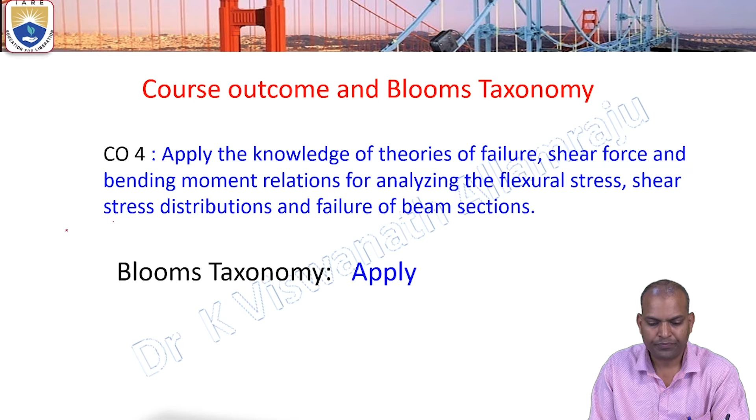So here, we are going to discuss in this session the shear stress distribution in beams or at a section. There are various sections: one is rectangular, another one is square, I section, T sections. But here we consider a simply supported beam carrying UDL, uniformly distributed load, and we are going to discuss how the shear stress is varying across the section of the beam.

Whenever the load is applied on the beam, along with the shear stress, bending moment also varies. So bending moment and shear stress simultaneously occur in a section of the beam. But here we are considering only shear stress distribution across the section of the beam.

Now figure A indicates this figure. It is a simply supported beam subjected to uniformly distributed load. It is simply supported at the ends, and it is subjected to uniformly distributed load throughout the span of the beam. Now we consider two sections: one section is AB and another section is CD. If you see the side view of the figure, the sections AB and CD are side views of the section.

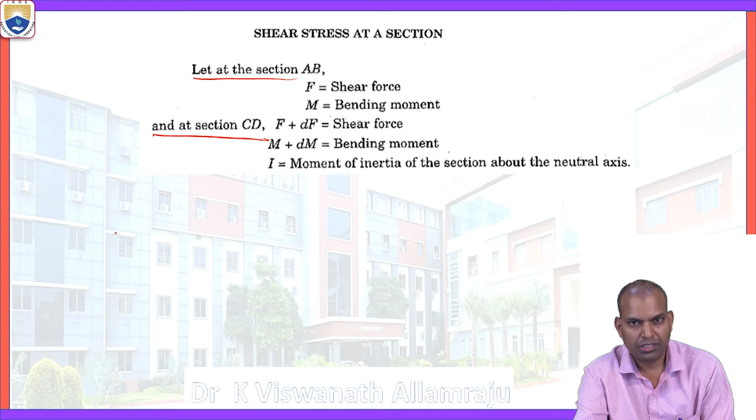Now what is that area? dA is the elemental area. The total area is the hatched section, that is EFGH. This is the section. Here F is the shear force and M is the bending moment at section AB. At section CD, F plus dF is the shear force and M plus dM is the bending moment, and I is the moment of inertia of the section about the neutral axis.

NA is the neutral axis. This is ABCD. This is EFGH in side view, but this is ABCD at the sections. Here one layer is considered at a distance y1 from the neutral axis. That is where the layer is beginning. This portion is y1 from the neutral axis.

And there is another one, that is y. For this hatched area, dA, there is a centroidal axis. That centroidal axis is at a distance y from the neutral axis. So y1 is the distance of the beginning of the shaded area from the neutral axis, whereas y is the distance of the centroidal axis of the shaded area from the neutral axis.

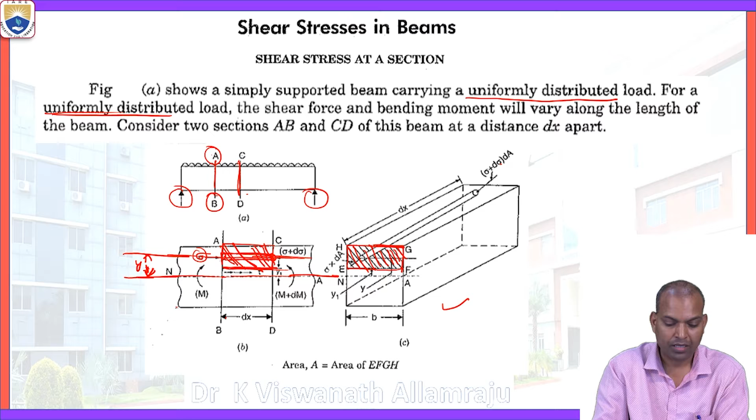Now it is required here, and it is mentioned for students' easy understanding. Even by going through the slides, they can read and understand better.

Now here, for the shear forces, we are considering the shear stress on the portion EFGH, which has the length dx. On the AB section, the distance is y1 from the neutral axis. Figure C shows the cross section of the beam.

Now on the cross section of the beam, there is EF and GH. Let EF be a line at a distance of y1 from the neutral axis. Now we are considering the part of the beam above the level EF, that is EFGH, between the sections AB and CD.

This part of the beam may be taken to consist of an infinite number of elemental cylinders. These are the elemental cylinders. Each elemental cylinder's area is dA, and the length of the elemental cylinder is dx.

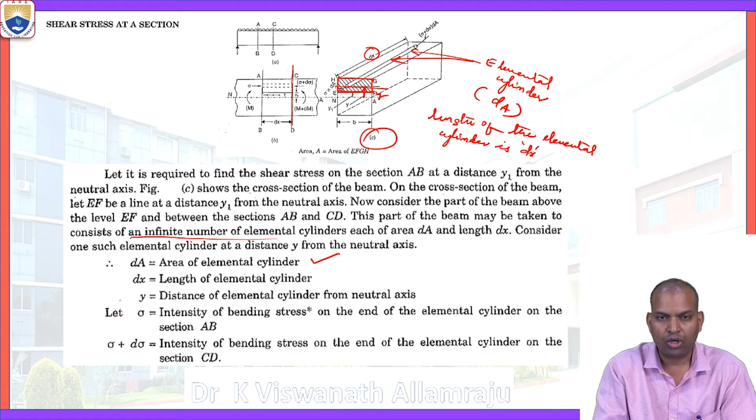Now dA is the area of the elemental cylinder, which is very important, and dx is the length of the elemental cylinder. And y is the distance of the elemental cylinder from the neutral axis. Sigma is the intensity of bending stress on one end of the elemental cylinder, that is section AB, and sigma plus d sigma is the intensity of bending stress on the other end, that is section CD.

This elemental cylinder's area of cross section is dA. On one side is section AB, and on the other is the CD side. On the AB side it is sigma, and on the CD side it is sigma plus d sigma; that is the bending stress this elemental cylinder is experiencing.

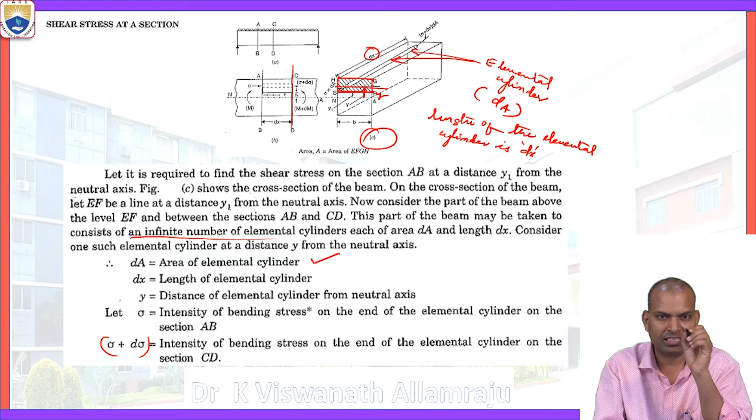One more important parameter is dx, which indicates the length of the elemental cylinder. So what we are going to do is first consider what force is acting on this elemental cylinder, then integrate it over the total area, from the EF line to HG.

Now, what is the bending stress? We know the pure bending formula, the theory of pure bending: sigma by y equals M by I. From this, the bending stress on section AB is sigma equals M by I times y. On section AB the bending moment is M, and on section CD the bending moment is M plus dM.

Then what about stress? The intensity of bending stress becomes sigma plus d sigma on section CD, that is, in place of M substitute M plus dM, by I times y. So on section CD the bending moment is M plus dM, and the bending stress is sigma plus d sigma.

Now we are going to find out the force we need. The force equals stress times elemental area. So now let us find out the forces on the two ends of the elemental cylinder. On the side AB, it is sigma times dA.

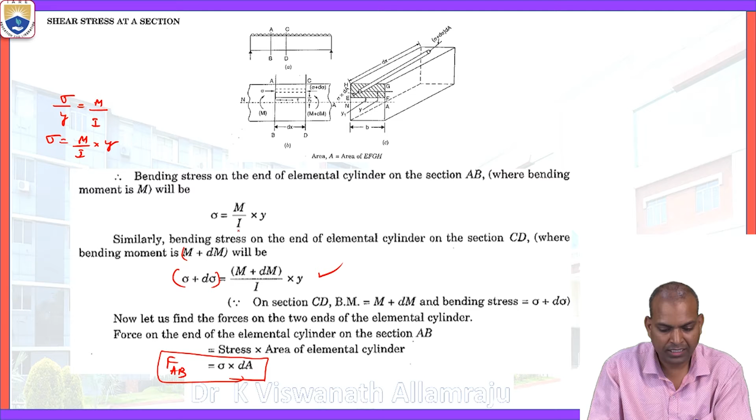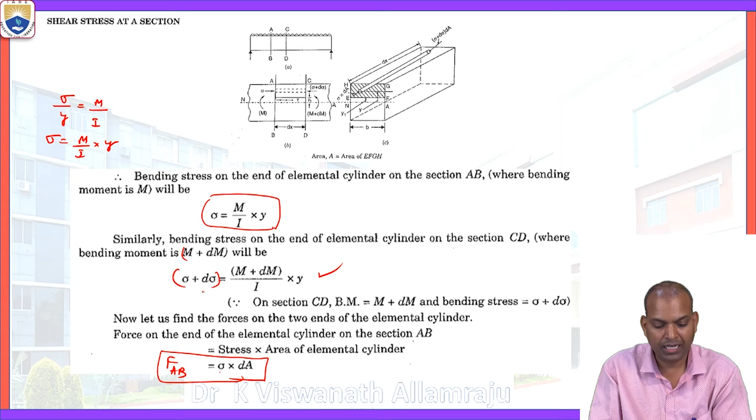Now on the side, that is M by I times at the section, we know that sigma into dA, that is M by I into y dA. Yes, sigma equal to M by I times y. Now what is the sigma? Sigma times dA. Substitute in the place of sigma, that is M by I times y. It is not a value, it's the equation. What is the sigma? M by I times y. Substitute that M by I times y in the place of the sigma.

Then that is force on AB. That is M by I times y dA. That is on section AB. And consider again force on section CD. The force on section CD equals stress times area, that is sigma plus d sigma times dA. Now we know again the formula, that is sigma equal to M by I times y. What is that M here? M plus dM by I times y.

Multiply this sigma times dA. No, sigma plus d sigma into dA. What is sigma plus d sigma? That is M plus dM by I into y dA. Now one of the elemental sides is M by I into y dA. Another side is M plus dM by I times y dA. So on one side it is more, on one side it is less. So there is unbalancing. What is that unbalanced force?

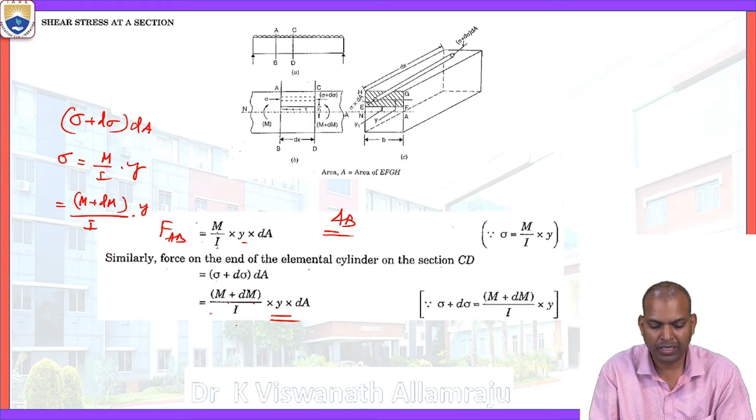The unbalanced force will come by subtracting right side force minus left side force. That is M plus dM by I times y dA minus M by I times y dA. This is the net unbalanced force. Further simplification: M by I times y dA plus dM by I times y dA minus M by I times y dA. Now M by I times y dA, positive and negative, is going to be cancelled. That is dM by I times y dA.

Now this is the net unbalanced force on the elemental cylinder, where dM is the change of moment of resistance, I is the second moment of area, y is the distance of the EF layer from the neutral axis, and dA is the elemental area. Now that is the elemental net unbalanced force on the elemental cylinder. We want the total unbalanced force.

The total unbalanced force means we have to integrate that equation, that is integral of dM by I times y dA. dM by I comes out, the moment of resistance doesn't change, but integral y dA remains. Now what is that integral y dA? From the concept of engineering mechanics and centroid, y dA is nothing but A y bar. Then total unbalanced force is dM by I times A y bar.

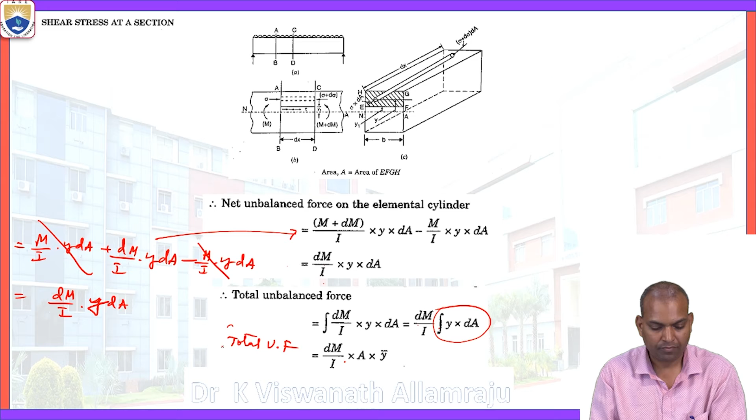Now this unbalanced force is nothing but shear force. That unbalanced force is causing shear, that is a shear resistance at the level of EF. What is the shear force? That means shear stress times area. What is that area? Where the length is dx and width is b. Tau, the shear stress, times b dx. That is the shear force.

So this shear force or shear resistance is equal to the unbalanced force. Tau into b dx equal to dM by I times A y bar. Now we want shear stress, then it becomes tau equal to dM by I A y bar by b dx. Further simplification, dM by dx A y bar by I b. This dM by dx is nothing but the shear force. That is shear force F times A y bar by I b. That is the shear stress.

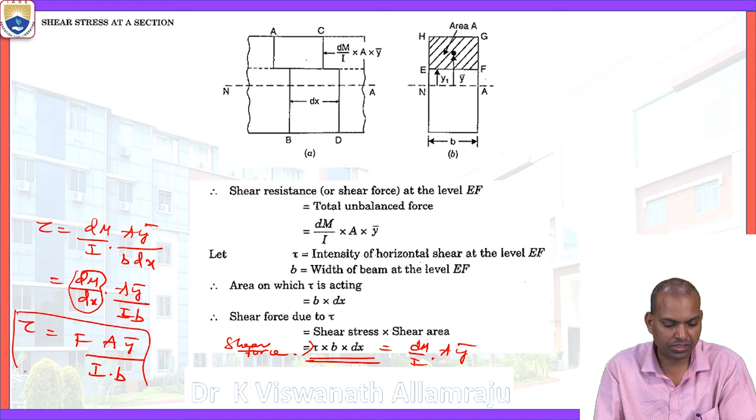This is the equation. Tau into b dx equal to dM by I times A y bar. Tau equal to dM by I A y bar by b dx. Separating, dM by dx A y bar by I b. This dM by dx is the change of moment per distance, that is the shear force, so shear force times A y bar by I b. This is the shear stress equation. This is the general formula that you can apply for all types of sections.

So tau equals F A y bar by I b, where tau is the shear stress, F is the shear force, A is the area of the hatched section which we considered here, the area of EFGH. Y bar is the centroidal distance of the hatched area from the neutral axis. I is the moment of inertia.

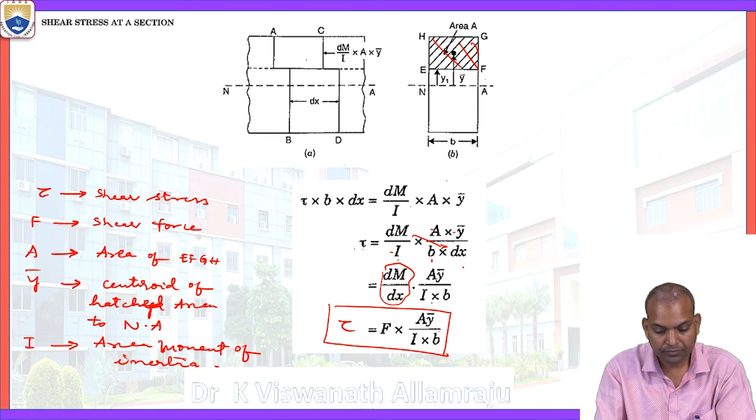Tau is equal to F A y bar by I b. Now let us discuss a problem based on how to apply this equation. A wooden beam of 100 millimeters wide and 150 millimeters deep is simply supported over a span of 4 meters. The shear force at a section of the beam, that is F, is equal to 4500 newtons.

Find the shear stress at a distance of 25 millimeters above the neutral axis. We want shear stress at a distance of 25 millimeters from the neutral axis. So how to start? We know the shear stress formula, that is tau equal to F A y bar by I b.

What is that area? A is the area of the beam above y1. This is the hatched area. That area equals width 100 millimeters times depth 50 millimeters, 100 into 50, that is 5000 square millimeters. Tau equal to F A y bar by I times b. We know the shear force given is 4500 newtons. The elemental hatched area we just calculated is 5000 square millimeters. y bar we need.

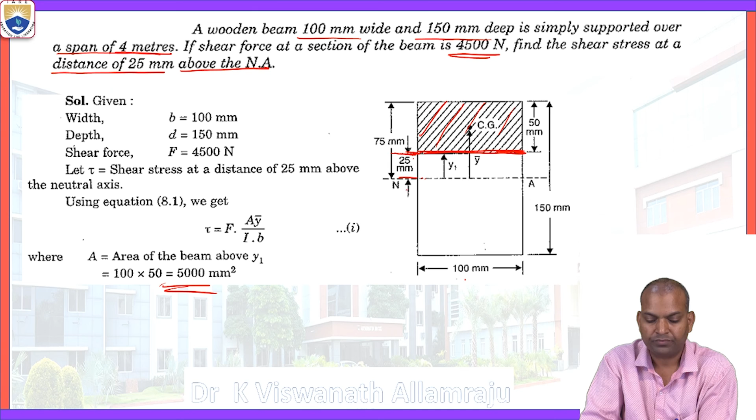And what about b? b is the actual width of the section at a distance y1 from the neutral axis. At a distance y1, this is the width. Suppose we consider E, F, G, H. This EF width is 100 millimeters. Substitute all these values.

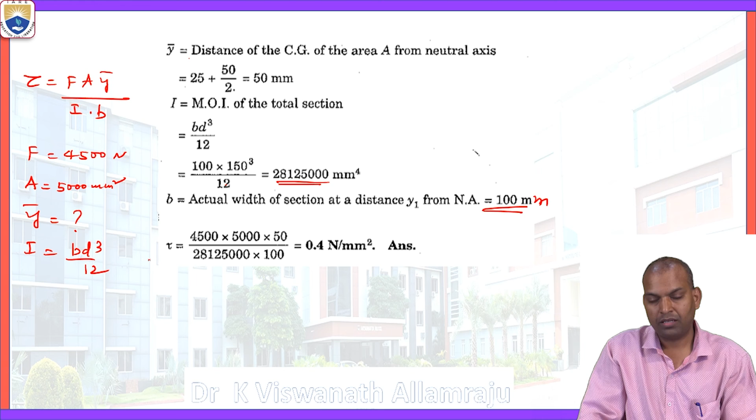Now y bar, how to get it? It is the distance of the center of gravity of the area A from the neutral axis. This hatched area is the area we consider now, and its centroid to the neutral axis. The distance up to EF is 25 millimeters. So y bar equals 25 plus 50 by 2, that is 50 millimeters. I equals 28125000 mm to the power 4.

b is 100 millimeters. Substituting all these values in the formula tau equal to F A y bar by I times b: F is 4500, A is 5000 square millimeters, y bar is 50 millimeters, I is 28125000 millimeters to the power 4, and width b is 100 millimeters. After substituting, the shear stress at a distance of 25 millimeters is 0.4 newton per square millimeter.

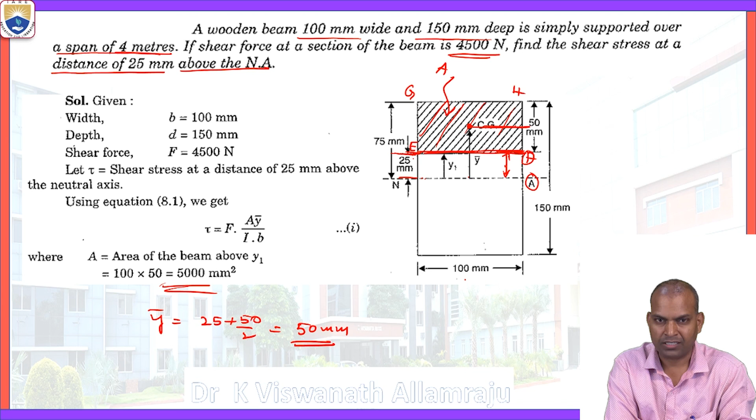So in this manner we have to apply this formula in real applications. When the data is given of a wooden beam with a width of 100 millimeters and depth of 150 millimeters, if you want the shear stress at a distance of 30 millimeters, we can consider it. So we can find the shear stress variation at any distance.

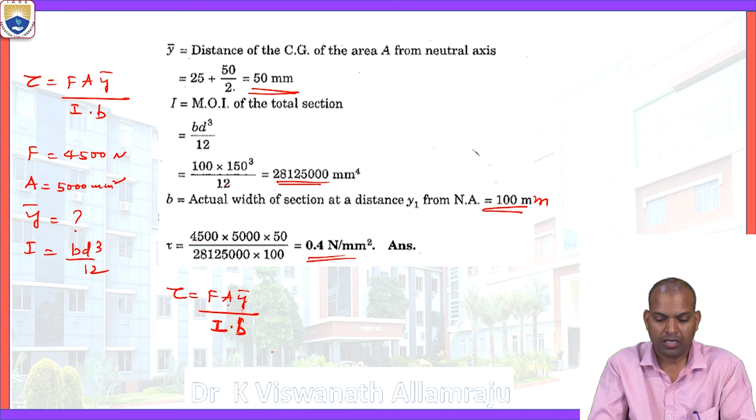Now the important interpretation is that the shear stress is proportional to the shear force, the hatched area and y bar, and it is inversely proportional to I and b. Now b is the width. If the width is more, the shear stress becomes less. In this manner, we have to apply and solve the problem.

The references followed in this session are textbooks, reference books and web references to better understand the concepts of shear stress distribution of a section.